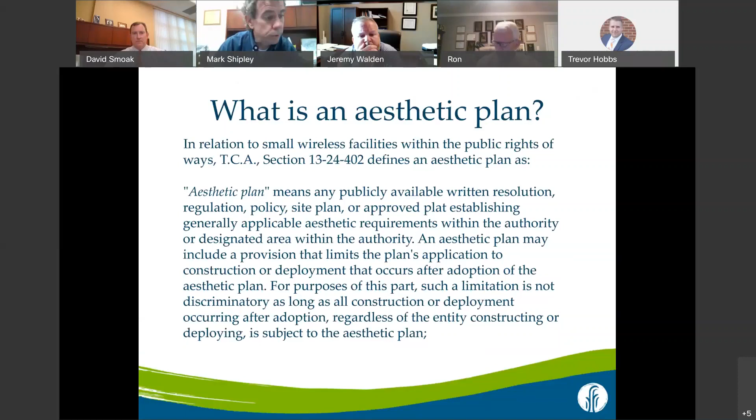As I mentioned, some of our specific goals that we're looking for here. I think it's important that we pay attention to the appearance of our community. I think it's why a lot of people move here and do business in Farragut. You can always tell when you enter or leave the town.

And I think that's something that we take a lot of pride in. So when we have these new utility systems that are proposed and they have a vertical component, what we're trying to do is make sure that those are as attractive as possible, there are as few of them as possible, and that they're appropriate for the context of where they're being proposed.

Eliminating or minimizing visual clutter, being consistent with the new vertical utility structures. This plan is not just dealing with small cell support structures. It's any new vertical utility structures that would be in public rights of ways.

That could be really in the context of what we have in the town, since all of our utilities are required to be underground, all the new ones. What we're really talking about are telecommunications and street lighting for the most part. So that's really what this plan is focused on.

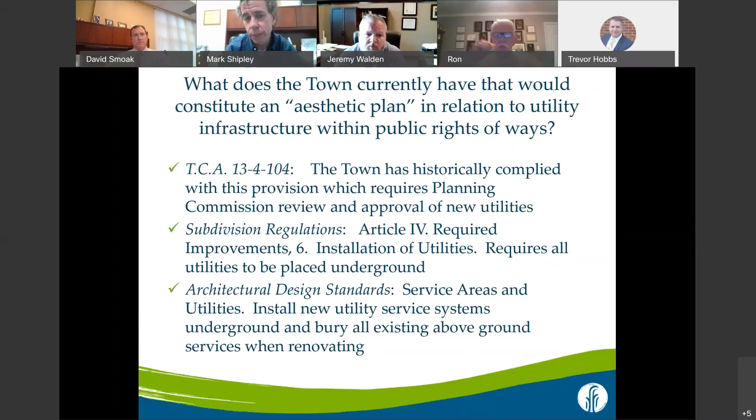And not all of those are in the public rights of ways. We'll talk about that in a minute. The architectural design standards talks a little bit about utilities and the importance of hiding them or concealing them to the greatest extent possible. In 2017, in response to a couple of small cell support structures that we had come to our community on Parkside Drive, we actually went back and revisited our cell tower provisions.

Because they were really only targeting monopoles, the big tall cell towers that are on private property, we tried to update both of those provisions and then also create some provisions that deal with these small cell support structures and DAS technologies. So we put a lot of things in place.

We spent a lot of time. We had a couple of experts in the telecommunications field help us through that process. And I thought we had a pretty good document. There's a lot of things in it that would constitute elements of an aesthetic plan.

But unfortunately, some of those things were superseded or essentially nullified when the state adopted their telecommunications law in 2018, roughly a year after ours. So you could see on the screen there the different components in our current antennas and towers section, which is in our zoning ordinance, that would really constitute elements of an aesthetic plan.

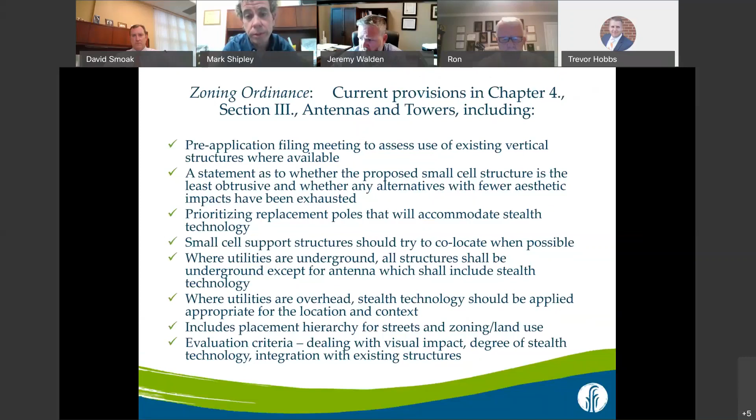Some additional options to consider now that the state has created provisions that supersede what we have. We went back to the drawing board and asked ourselves, within the state law, what can we do? And then, how do we go about doing that?

Some additional options we're looking at are ways to enhance the aesthetic language in our current zoning ordinance. Since this doesn't just deal with telecommunications, we could create a separate section in the municipal code for an aesthetic plan, cross-referencing the antennas and towers section or other sections dealing with street lighting. This would be a document that clearly and prescriptively addresses the appearance of these new vertical utility systems.

That's really the void we're trying to fill. Some of the language in our current telecommunications ordinance was intentionally a little vague, like 'stealth technology.' We do define it, but it's still a bit subjective. So one of the things we're trying to do with this plan is take out a lot of that subjectivity and make it very prescriptive. We'll talk about that when I get to discussing the staff's draft.

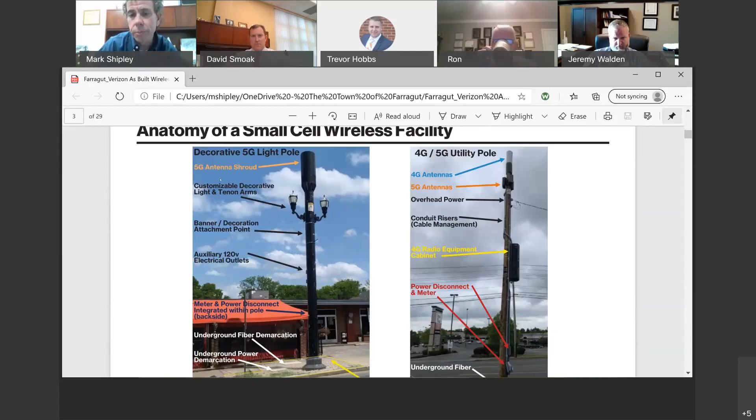They go through a series of different options. Pole co-location - Jeremy's with us here from LCUB - that's obviously the town's favorite result. If you've got a utility system already in place, there's a way to add your structures to that existing system. That's the best option because you're not creating additional new vertical utilities.

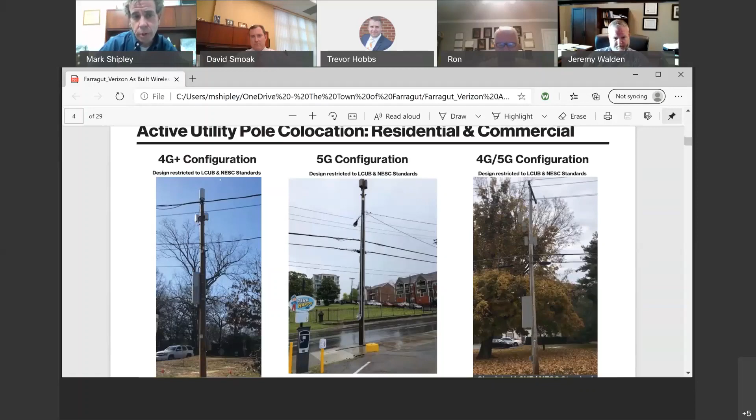So these are some different images of poles. Some are really stealth, some are a little bit more bulky. Some are 4 and 5G - the radio antenna cabinet on the 4G system creates some bulk. What I'm proposing in the draft is if you have a 4G system, that radio cabinet is actually at the base of the metal pole, so it's more part of the pole as opposed to protruding out from it.

If you've got an existing wooden pole that's part of an overhead distribution line system, and they're going to add back a wooden pole, then you really don't have a lot of options. So you just try to make the size of that cabinet as small as possible, and keep it as close to the pole as possible.

They get into some decorative poles, and these are metal pole options, which is what I'm proposing for all replacement poles or new poles in the draft. That's something I do need feedback on.

The main reason for that is you can put a lot of stuff inside the pole, and it has more opportunities for additional uses in the future. That was one of the things I was talking about as an objective of the plan - to try to think ahead. It's kind of like building a stucco building versus a brick building, different construction types.

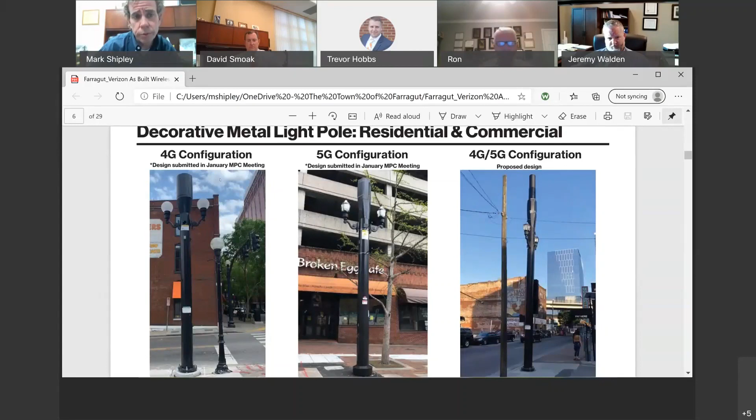So these are pretty nice looking poles, 4 and 5G combinations - these are obviously with some decorative lighting. And then some standalone metal poles with different configurations. The one in the middle is probably most similar to what's on Parkside Drive.

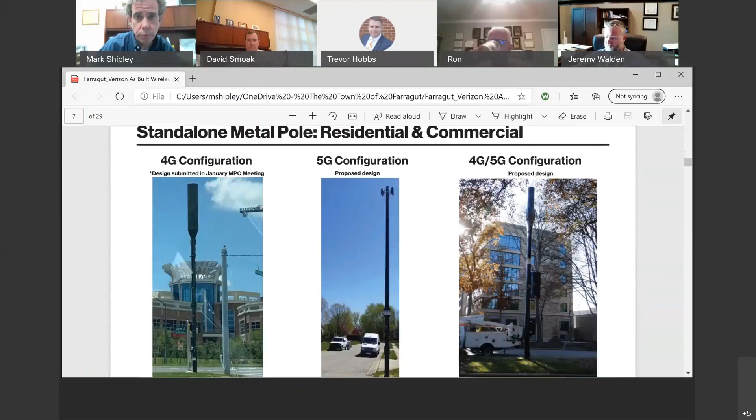Those are metal light poles, and they have the antenna near the top of those poles, but the antenna does kind of extend out away from the pole, which is a little bit different than what we're recommending in the aesthetic plan. Then some of these other antennas are pretty stealth.

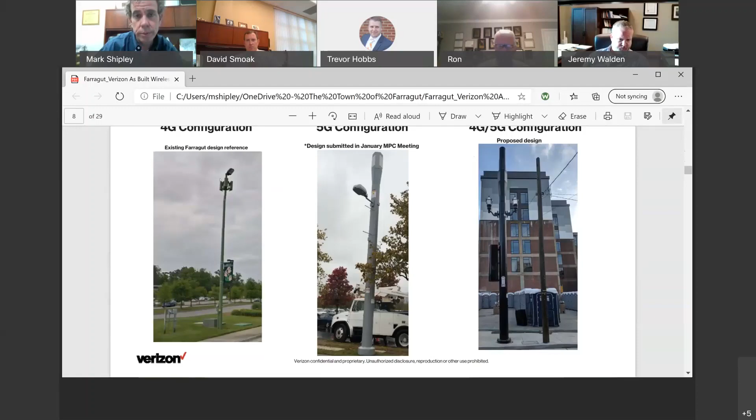This example on the left is actually a pole in Farragut - that was one of our early poles with Zayo, put in 2017. I'm just showing you these to show you that there's really a lot of choices out there. These companies can do more than they may initially say they can do or would want to do, if the community has something in place that says, this is what we expect and what you need to do.

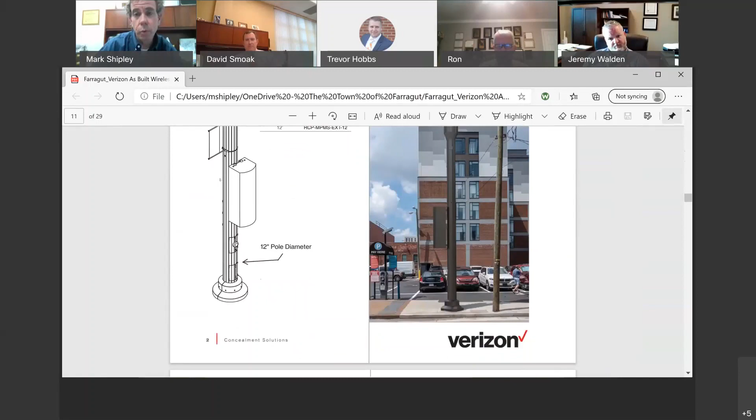And then they have some visuals here with a bit more detail. Here's a 4-5G combination with a pole extension opportunity, but again you see that 4G cabinet that extends off the pole - that's one thing I need your feedback on. What I'm recommending is that be incorporated into the base of the pole instead. We'll see an example of what that looks like later. I think it just looks a little bit more stealth than that option.

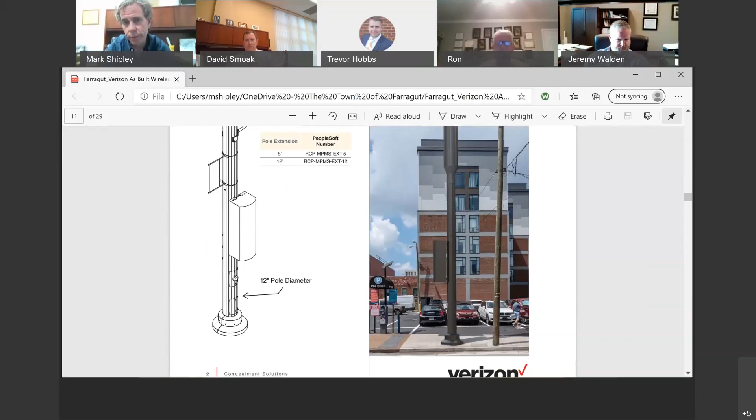Here's another one - not a bad looking pole, but the 4G cabinet kind of takes away a fair amount of the stealth aspect of that.

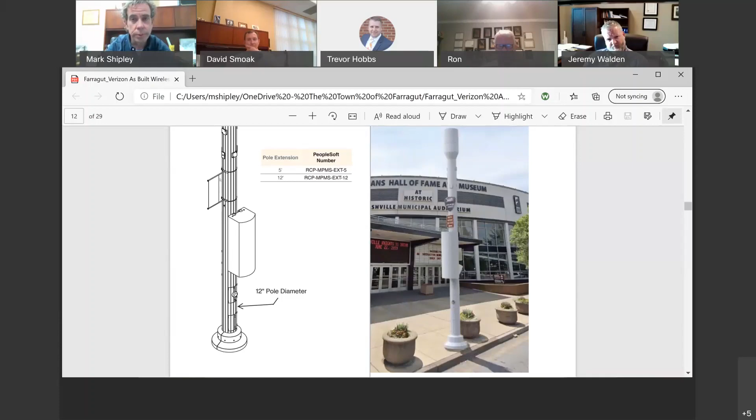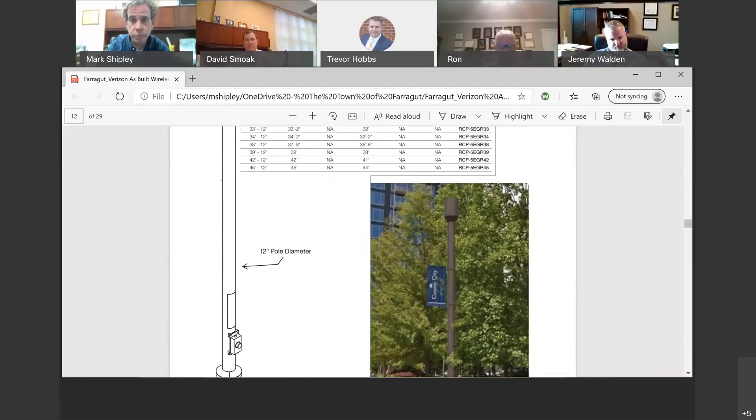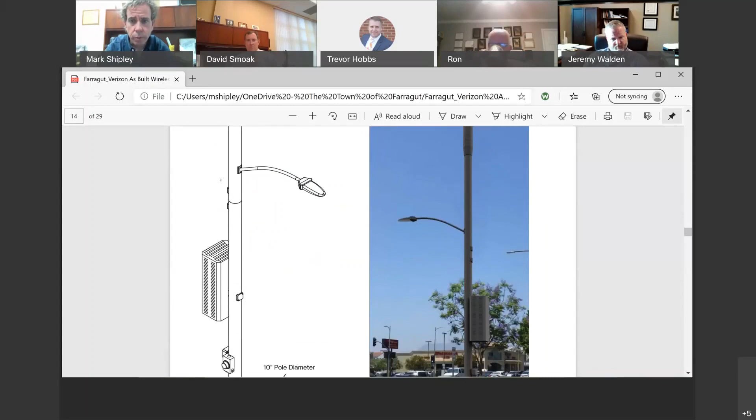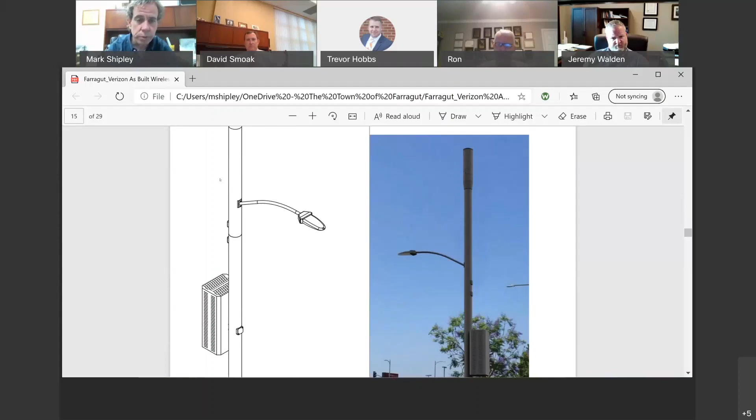Another example, I'll go through these quickly. I want to spend most of the time on the draft and getting your feedback. Most of these 5G poles shown, the metal ones, are pretty stealth. The 4-5G combination, which is what we'd recommend on a new pole in a new location, has to have a dual function—whether it's 4 and 5G, Verizon and AT&T, Verizon and US Cellular, or telecommunications and lighting. It just has to provide for at least 2 different functions on that pole.

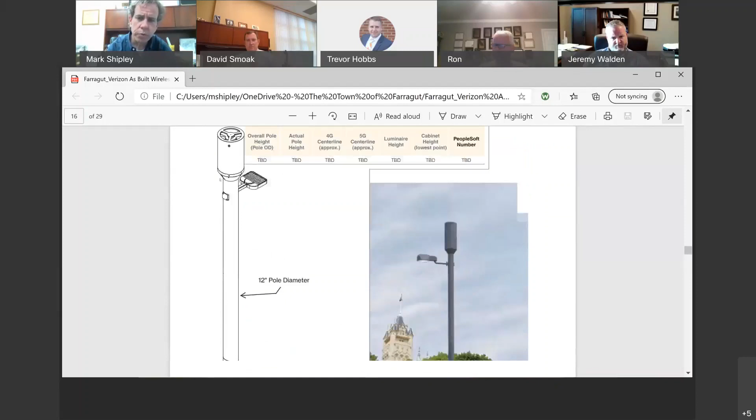Most of these poles we're looking at are 10 to 12 inches in diameter. What I'm proposing in the draft is 12.75 inches, which is a pretty common standard from what I've looked at. Here's a pretty stealth 5G pole with a 12-inch diameter, with the street light incorporated near the top. I don't think most people would ever notice that.

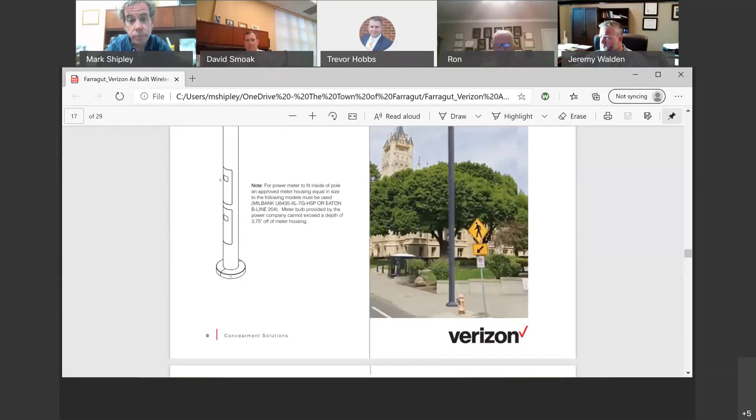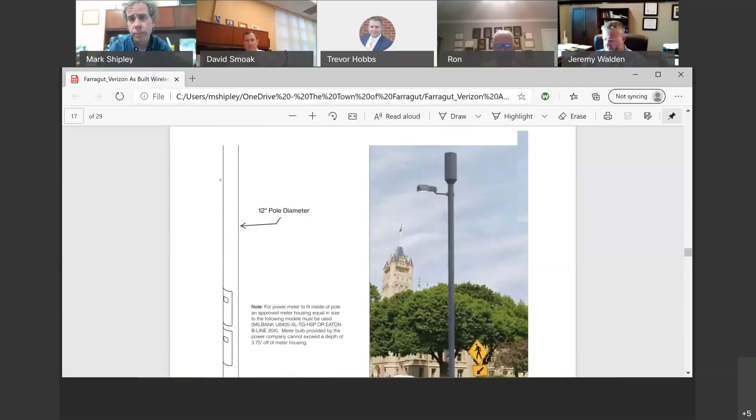Mark, what's the size of the top—the antenna? Those are about 5 feet. The diameter is going to be between 16 and 20 inches, depending on whether it's just 5G or a combination, and anywhere from 3 to 6 feet in overall height. This one is not a combination, it's just a 5G pole.

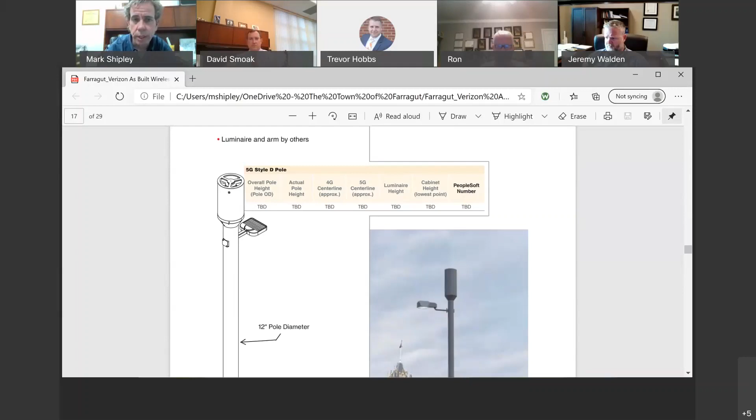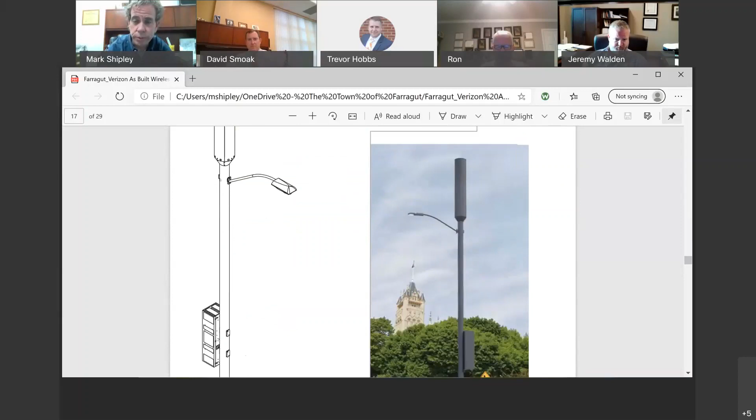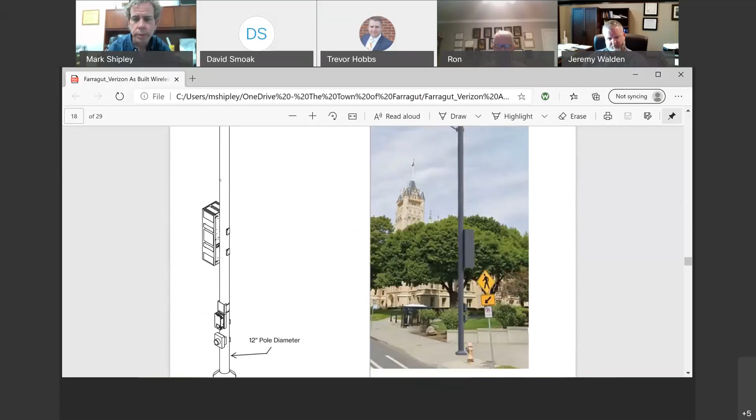Here's a 4 and 5G combination, and you can see how much bigger that antenna is at the top because it has both antennas in that shroud, plus the 4G radio cabinet about halfway down. This next one is just 5G. If you didn't require more than one potential carrier, your antenna would be smaller, but the downside is you might have more poles. That's something to think about.

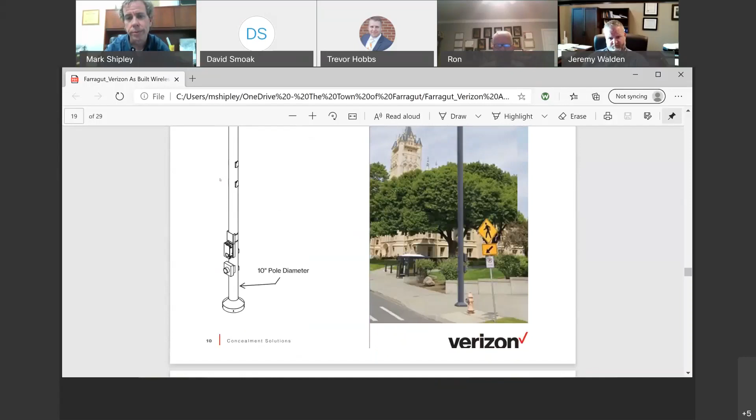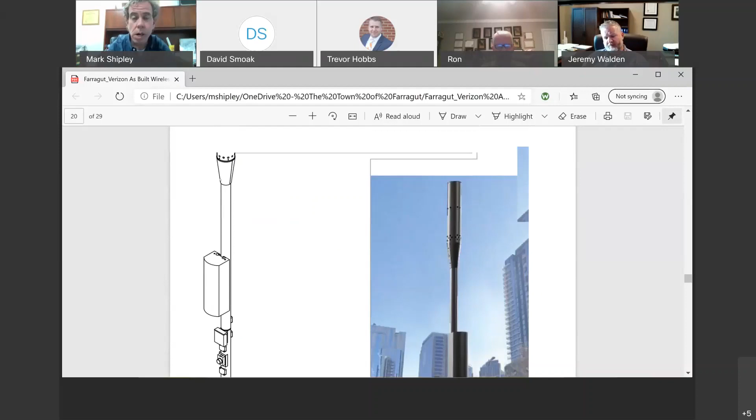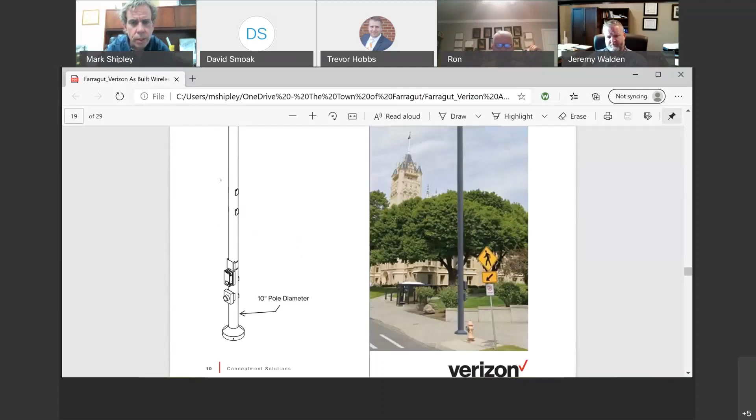Mark asks a question, maybe Jeremy can help. There's a meter on that pole that protrudes. On this pole diameter, you can see the meter down there—can that be inset into the pole? Jeremy, I don't think they read meters in person anymore, isn't that done electronically now?

We read meters remotely now, we do check. I don't know if there's technology out there that could install the base inset into the pole. As long as it met our requirements for accepting the type of meter required—the prongs and connectivity—we wouldn't have an issue with it, as long as we could remove it easily. I just don't know if that technology's out there.

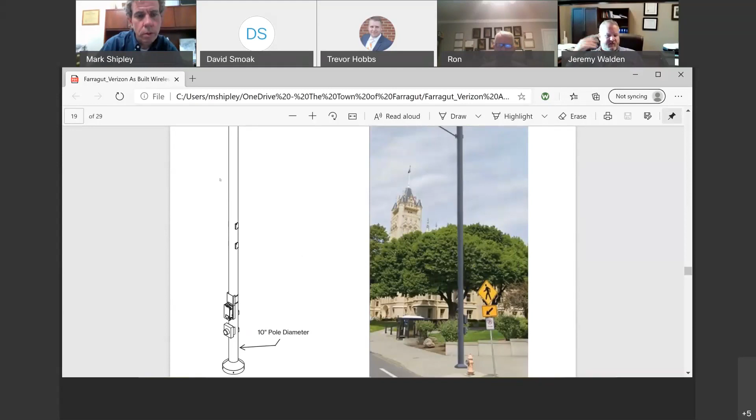Just curious—from a structural loading analysis standpoint, when you put insets at the base of the pole, because of the bending moment at the bottom, the integrity of the pole becomes a little less. But since there's nothing pulling on this pole other than maybe wind, I don't know that it would be an issue.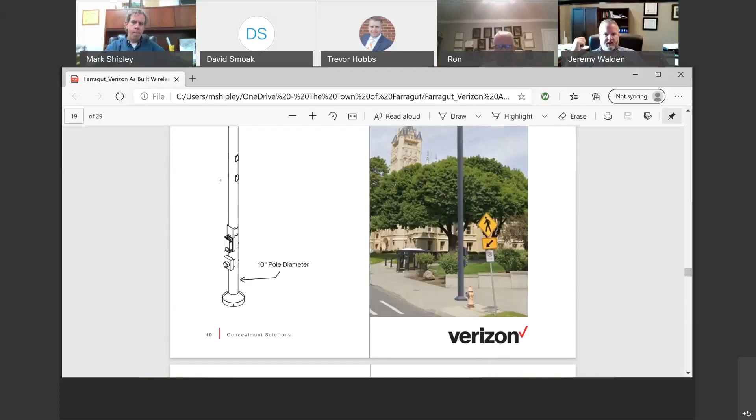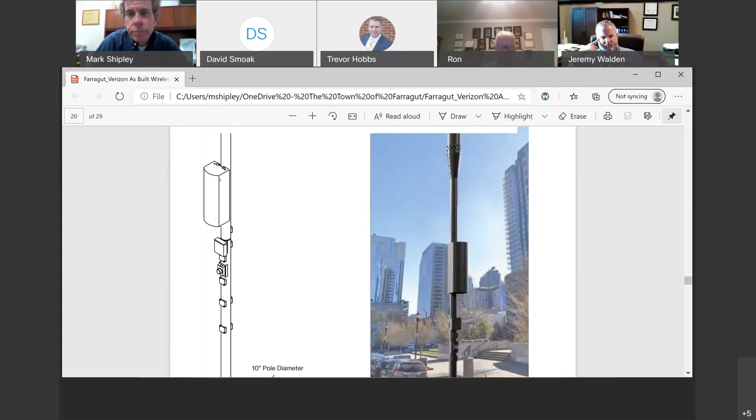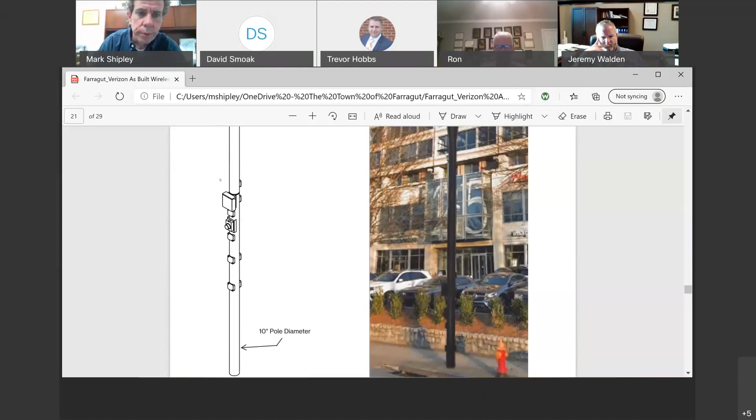Okay, thank you. I'll keep going through these if I see anything that stands out. Again, like this one, some of those structures are higher up on the pole—they can probably put it wherever it needs to go, but that may or may not help with the stealthness of it.

I was concerned about the possibility of damage by somebody—vandalism. Oh yeah, that's always a possibility. I'm sure Jeremy's had some transformers tagged before, people get creative. We've got quite a few poles with meters down at the base, and it doesn't seem to be a real issue for us as far as vandalism goes.

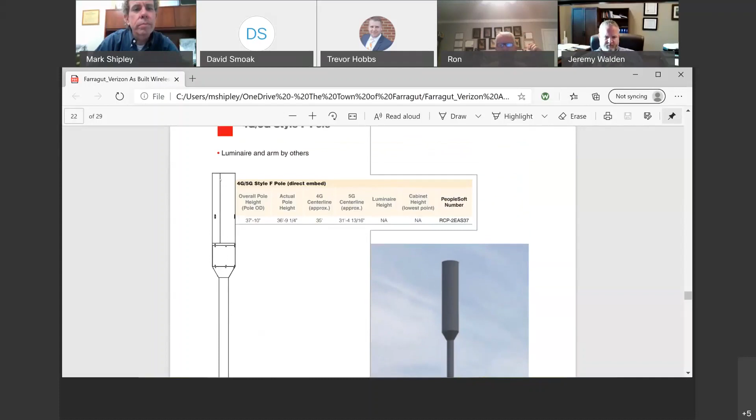Well, I don't think people really concern themselves with what carries the electricity as far as the type of pole. They concern themselves with technology they may not necessarily like in their neighborhood. True, yeah, that could be.

Now this pole here is probably one of the more similar to what we're proposing in our draft aesthetic plan, with the antenna. You've got the transitions, the different components on the pole, where they're tapered, and it's like a smooth, seamless kind of transition. And then that equipment cabinet's at the bottom, at the base.

That obviously does create more space at the ground interface. So if you've got things that could conflict, like a sidewalk or landscaping, that physical space might be a little bit larger by having the radio cabinet down there as opposed to being up on the riser pole. So that's something to think about.

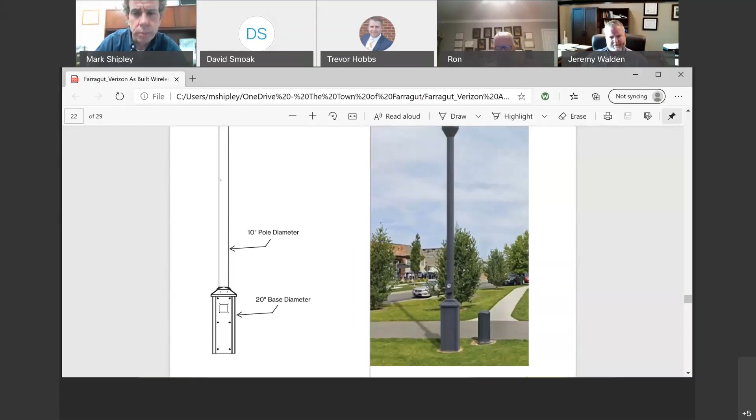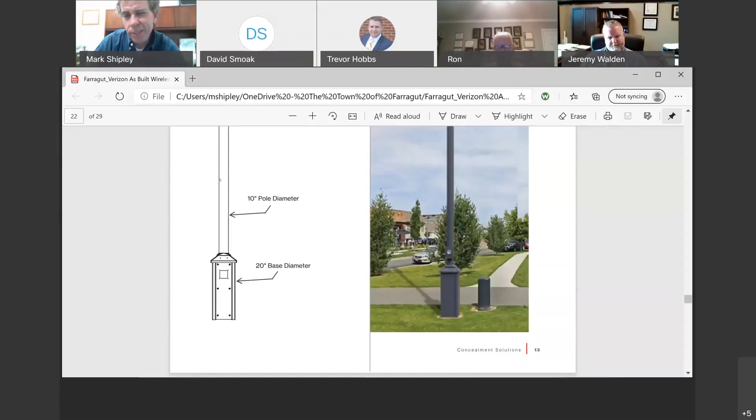I just, from my perspective, and it may just be my perspective, I think that is a better looking pole because it kind of balances itself out. It doesn't have something kind of hanging midway off of the riser pole as you go up. Just looks a little bit more stealth to me.

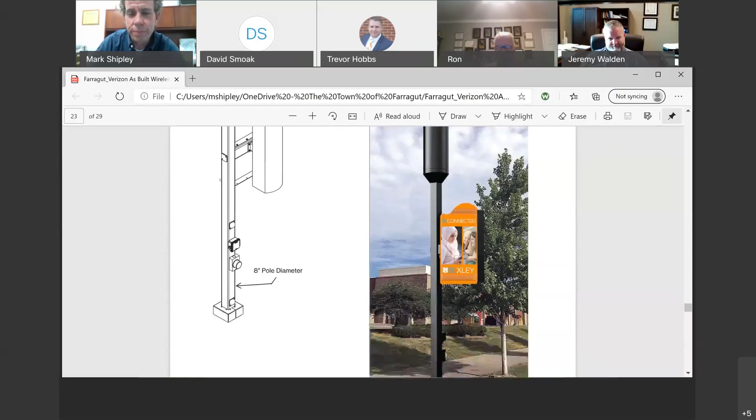So that's kind of a good example of what we're looking at. You can kind of get creative with these 4G cabinets and make them into the town's seasonal banners, and maybe do something with one side of them. This is actually a square pole. Of course, we wouldn't want those banners in a residential area. I was just throwing that out there because they have one on this one as a way to maybe make it more stealth looking or blend in.

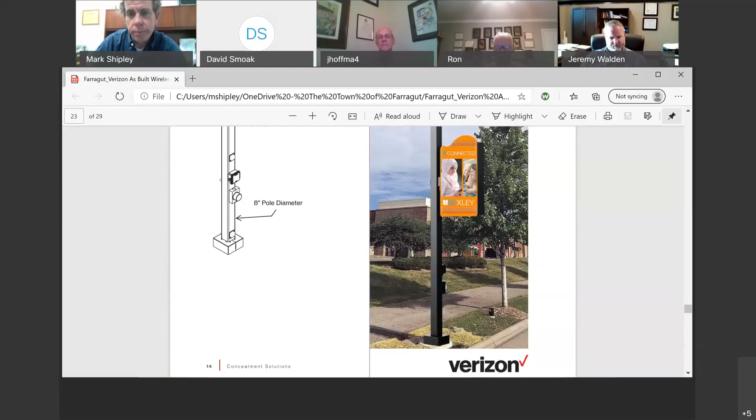And then they had some information here, and that's basically all that I had on that particular document. Did anybody have anything they want me to go back in this for before I go back to the PowerPoint? I just really wanted to show you all there's so many different styles and options out there that we could look at.

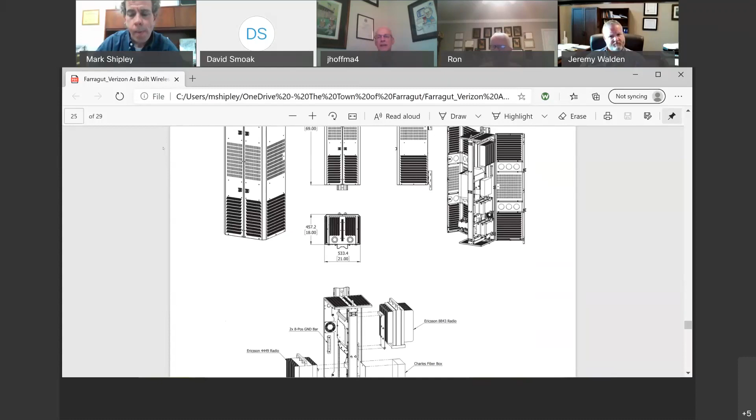Just a quick comment on slides 5 and 7 of their proposal. You'll see poles that are placed very close to driveways. That would be something that I personally wouldn't recommend from a safety standpoint. You'd have a see-over or see-around issue, but equally important, you've got people trying to drive in and out of their driveways and clipping the poles with trailers or moving trucks or whatever.

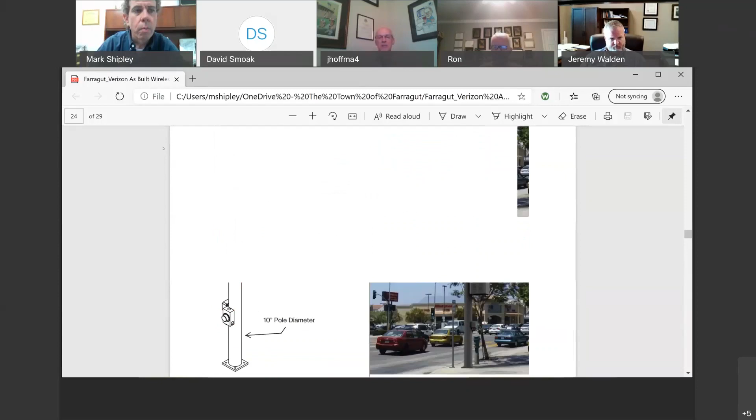Yeah, that would be a concern that I would have. I'm not sure it's aesthetic as much as it is safety, but yeah, on those, what will be called in our draft type 3 poles, because there'll be new poles and new locations, we do have some placement considerations built into the draft that talk about where you're placing these new poles and making sure you're not creating conflicts or visibility obstructions and things like that. We'll go over that here in a minute.

But were you talking about these here, John? Yeah, if you look at where that pole is, that's probably 1.5 feet from that fellow's driveway. I'd hate to get him moving there, or a house trailer or a boat or whatever.

Yeah, we actually had one of the nodes that the Planning Commission looked at back in January. They had to move it a few feet away from the guy's driveway because he came to the Planning Commission meeting and had a concern about that. He said he wasn't a good driver and he's very likely going to hit that thing one day. So I guess they realized they didn't want to have that chance being taken, and they ended up moving it a few feet away from the driveway.

So hopefully, if we run into situations like that, they can move them at least 10 to 15 feet one way or the other. Because that's going to be important in a lot of areas where you've got potential conflicts. All right, so I'm going to jump out of this unless anybody else has anything on this one.

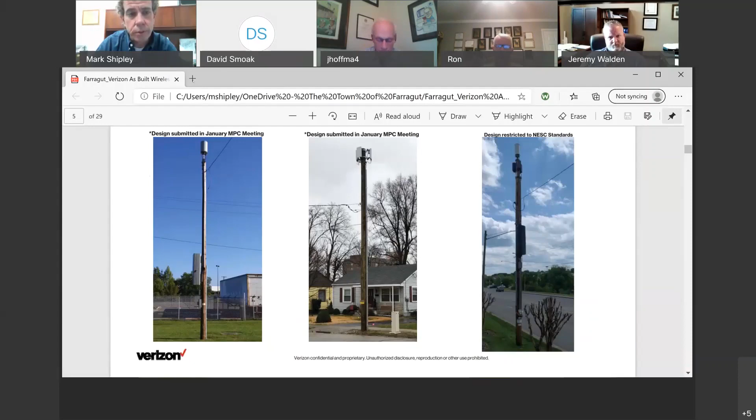Now I really want to spend most of the rest of what we have here talking through the draft aesthetic plan, and just going through what the current components are, and then asking you all some questions about the plan and getting your feedback. It is a draft.

There's still, and I understand in putting this together, there's still a lot of stuff that I'm not happy with, and it needs work. I just was at a point where I really needed some feedback to know which direction to go.

So let me just go through this draft by section and just talk through a little bit what we're talking about here. Obviously, with any document, you always want to have an authority section. We did that with the sign ordinance, John, as you remember. And then kind of related to that, a need. Why do we have this document? What are we trying to accomplish by having this document?

In the need section, we talk about the town's high aesthetic standards that we've always expected, and the fact that we've always had new utilities underground. So what we're trying to do with this plan is make sure these new vertical utilities that can't be placed underground look as good as possible. There aren't a whole lot of them, hopefully, so we can limit where they go and control the aesthetic impact to our community.

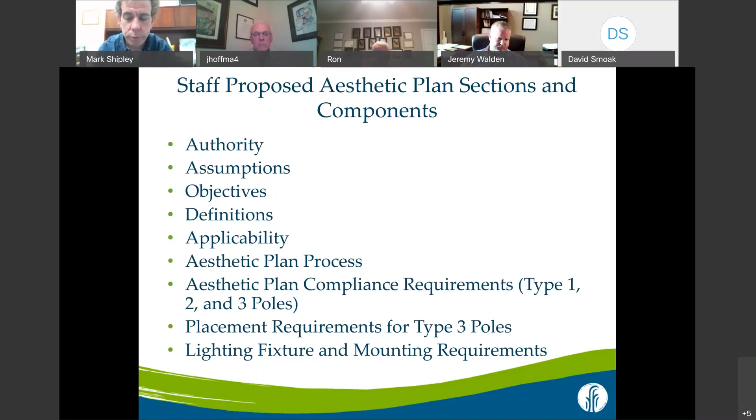And then we go to the assumptions section. We're assuming that we're going to continue to take utilities to the Planning Commission, and that we're going to continue to have all new utilities underground, except for the ones we're talking about in this plan. We also acknowledge the existing utility system in our community. There are existing overhead utility systems, which I've defined in the plan as overhead distribution and transmission line systems mainly, that service multiple utilities and typically have several lines on them.

So I wanted to be clear in the assumptions that really what we're talking about are telecommunications and streetlights. We're not proposing to deal with residential street lighting — that's a much different type of light than regular street lights, and it's also not required by the town. Subdivisions, homeowners associations, or developers, when putting a subdivision in, can choose whether they want to provide street lighting, and then they just have to follow the requirements in our subdivision regulations.

There's a 16-foot height limit, so that's not going to work for telecommunications. Plus, the pole itself isn't physically capable of accommodating these kinds of additional structures, and a lot of times these poles aren't even in the public right of way. So that's another thing — we're not talking about utilities outside of the public right of way. Even if they're in the utility easement, they're not really part of this plan. It's new utilities that are in the public right of way.

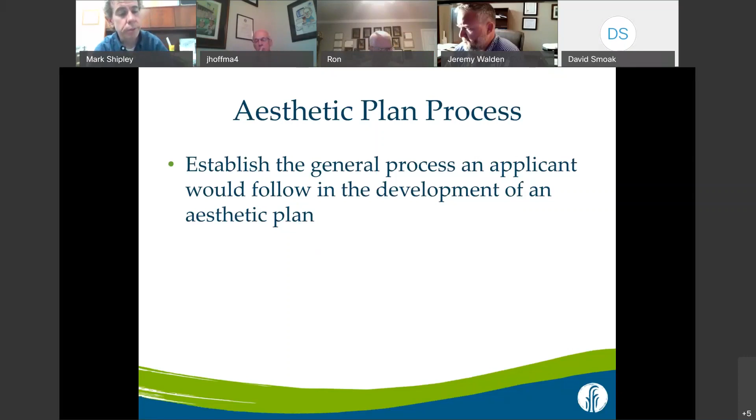So if somebody is ending up with a new pole, there are some specific requirements we would expect them to follow aesthetically. This would go through the Planning Commission, potentially the Board of Mayor and Aldermen - it depends, but it would very likely rarely, if ever, go to the Board of Mayor and Aldermen. And then there are the kinds of documents we would expect as part of a right-of-way permit, because that's going to be associated with the pole installation itself.

And then we get to the real heart, I guess, of the aesthetic plan, and that is the requirements for the different types of pole systems that we have. I went back and forth on this for a long time - there's a lot of stuff you could do with this, and I'm really just proposing probably the most simple, straightforward approach for consideration, at least.

The way I see it, you've got three types of poles in your community: poles that are part of an existing overhead utility system, street lights that are in a system that doesn't have any overhead utilities, like on Parkside Drive or South Campbell Station Road, and new poles in new locations. So the way the plan works is it deals with each of these very specifically.

So type 1 poles are kind of like what Jeremy would be mostly involved with, and these are probably mostly wooden poles, frankly, in the town, at least with the distribution lines.

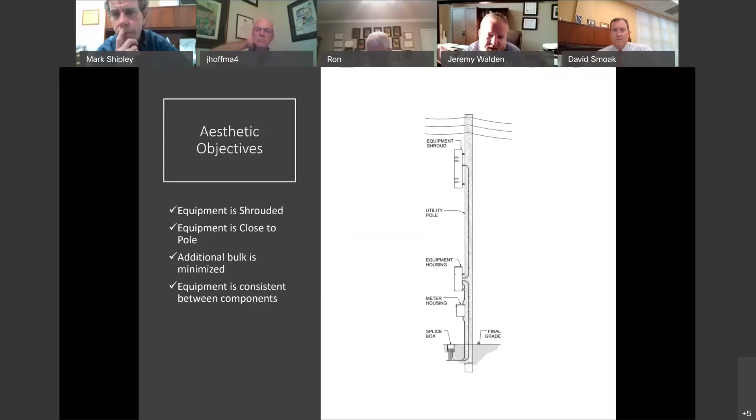We are not allowing that right now. That could change, but right now I'd say it's rare—there probably could be some poles out there that we may not have to change out, but given the size of most of these and the amount of attachments and telecoms we have on our poles, most of them are going to have to be changed out for a taller pole. Yeah, you have a lot of stuff on your poles.

Yeah, I think that's why they're not electing to go with our poles in a lot of situations, because our make-ready cost—what we call make-ready, to change the pole out—is a lot more than if they could set their own new pole. Yeah, because what I was recommending here, my assumption on the type 1 pole is that it wouldn't have to be modified.

They'll just, as long as it can carry the weight, whatever they're structurally sound enough. But what I am proposing with the other two poles is, if you did have to replace that wood pole in a wood pole system, what is in the draft now is that it would be going back as a metal pole.

But the other structures could be attached as is to the metal pole. So that's something we need to talk about, because I want to be clear that you understand what's in the draft on that.

Now, this pole here, since the antenna is below the lines, of course this is not a super busy utility line, would probably be okay as a type 1 pole with that. Wouldn't have to be modified. In other words, the pole wouldn't have to be taken out of the ground, replaced.

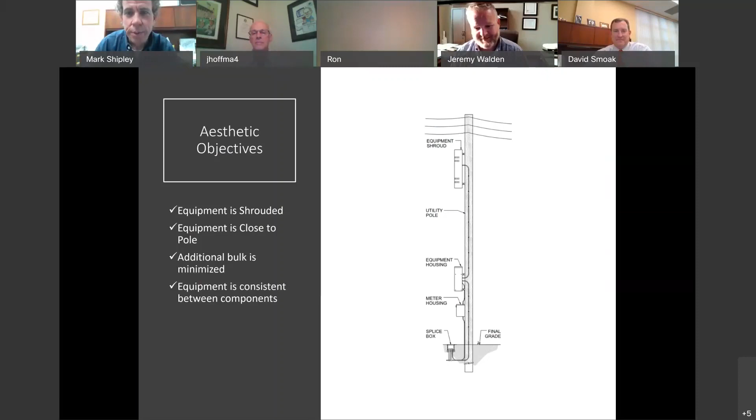Yeah, I'm gonna have to have some more detailed conversations with you all in particular about some of these things. But let me just go through this again real quick. Hey Mark, let me ask a quick question.

Looking at the drawing and the photographs, my question may be irrelevant, but I think it's important to ask. Do we have any provisions anywhere that define the existence of ladders or climbing hooks or similar things that allow people to go up the pole? My thinking is that if there are ladders or climbing hooks, it's going to be just like when I was a kid - some kid's going to want to climb it.

Well, LCUB has standards on that, I'm sure. LCUB standard is that any pole with a small cell has to be within 15 feet of a road and reachable by a bucket truck. In other words, we will not climb it. Okay, awesome.

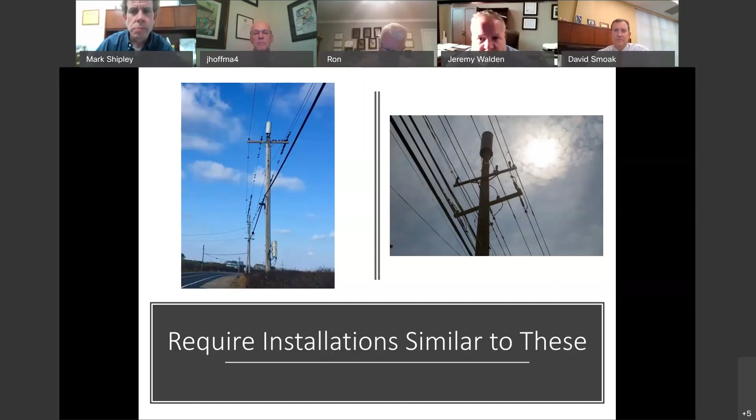Okay, the second type of pole - remember I only had 3 in this draft. The type 2 pole would be an existing pole that would have to be replaced to accommodate the proposed additional vertical utilities.

What we've seen so far, the most common example of that's been our light poles on Parkside Drive that have been replaced. Those actually, the old poles have actually been taken over to our public works facility so we could have spares if we needed them.

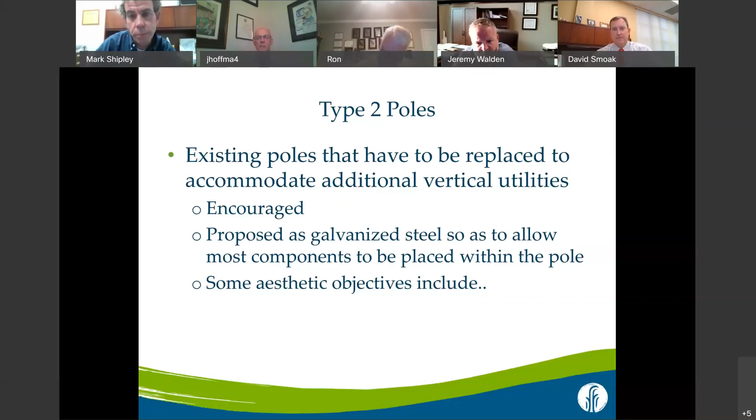So what we're talking about in that section of the plan is that's also an encouraged option, because again you've got an existing pole, an existing location. If you can accommodate these new structures on that pole, then that's better than putting a new pole in a new location. As I mentioned earlier, we're proposing galvanized steel so that it would have a hollow interior and the opportunity to place components within the pole and create a stealth appearance as possible.

And this is an example of what we would be looking for in a type 2 pole. You've got the light fixture there, and this one has a 4 and 5G option at the top, and then you've got that 4G radio antenna cabinet at the bottom.

All these sections of the pole system have a transitional element that makes the pole look seamless. Those are all kind of important aspects to trying to make these blend in to the greatest extent possible and look as narrow and least bulky as you can possibly have.

So with everything, the equipment would be shrouded. The equipment is actually built as part of or contained within the pole. And these are again the ideal situation that we're recommending - that all the equipment's consistent between the components, and as I mentioned earlier, the transitions are appropriate.

The location of the light fixture would allow for the most stealth possible location for telecommunication antennas. That's an issue right now that we have with some of our street lights on Campbell Station and Parkside Drive - the light is at the very top of the sign or top of the pole. So the antennas have to, when they're added to the pole, protrude away from the light for reception purposes. The idea would be to actually have the antenna or the antenna shroud above the light so that you eliminate that conflict. So that's something we need to look at with light pole systems, I think, as lights transition in and out throughout our community.

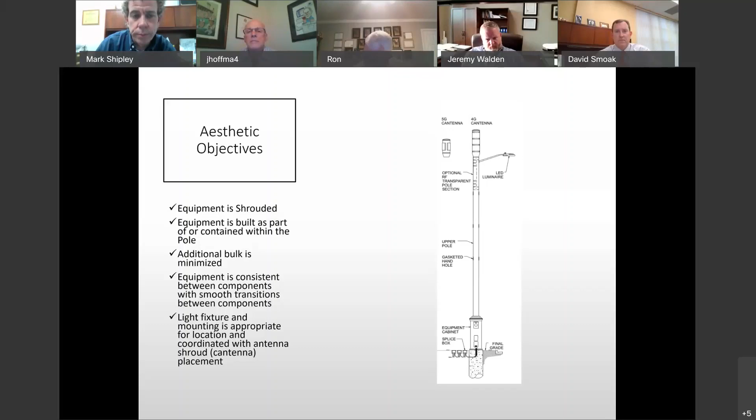Obviously structurally, the foundation has to be able to accommodate all the structures envisioned for that pole. That's the reason our light poles have to be replaced - they weren't designed to accommodate the weight of small cell support structure systems. So that's something you'd need to make sure about, establishing very specific dimensional limitations on the structures that can be added to poles.

What's in the draft is that the outer dimension of a cantenna is limited to 19 inches. Most of them are going to be less than that - most of the 4Gs are going to be between 14 and 16 inches, and the 5Gs could go out to as wide as 19. And then that cabinet at the base of the sign would be maxed out at 20 inches.

Making sure that all the wires and cabling is hidden either in the pole, or if it's on a wood pole, it's attached right against the pole so it's not visible. And then thinking about our lighting system being not just lights now - when a light is added somewhere, that light needs to serve more than one function. Can it provide the opportunity to have a telecommunications antenna on that pole in the future?

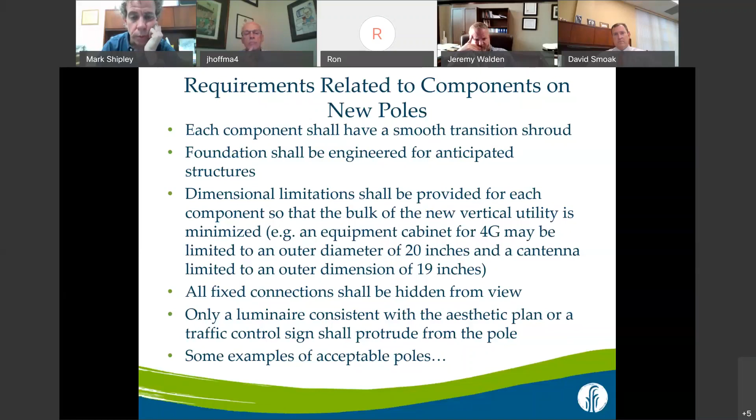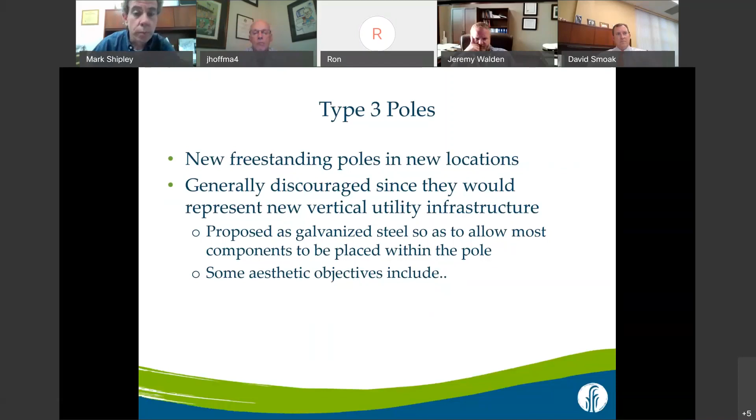And then finally the type 3 poles. Those are least desirable because this is new poles in new locations, which is what I'm trying to think here. I think all of Verizon's initial round would be type 3 poles. What we're proposing with these poles, similar to type 2, is that they would be galvanized steel, again, so that you can put stuff inside the pole to lessen the bulk.

And here's an example of the dual function requirement in these type 3 poles. The one on the left is a dual function pole - it has 2 different types of telecommunications technologies. And the pole on the right is dual function, it has the option of 4 or 5G plus a light in there. You can see the cabinets at the bottom kind of balance out the pole as a whole, as you've got wider space at the top and bottom with a pretty narrow riser pole in between.

And then all the transitional parts of the system kind of blend in together. So that's what we would be looking at in the draft if someone were to propose a new pole in a new location. It would look something like that.

Quick question - the illustration shows a combination of basically co-locating 4G and 5G. What about co-locating 2 5Gs on one pole? Yeah, you could do 2 5Gs. You could do a 5G AT&T, 5G US Cellular. All that we're recommending or requiring in the draft is that the pole has at least a dual function. So that would qualify, yeah. It could be 2 5Gs. As long as both are permitted, that would be a good thing.

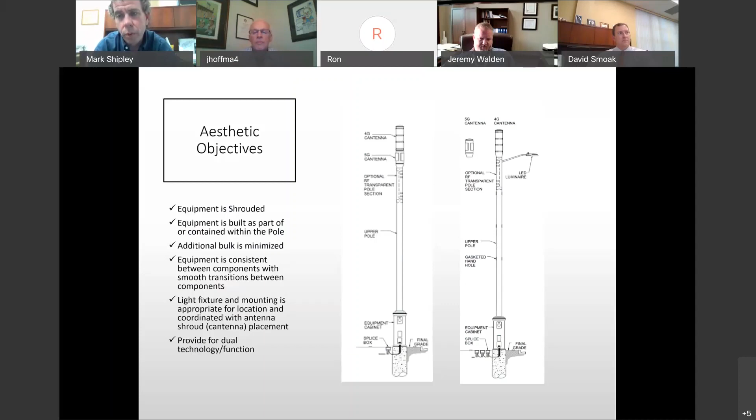So with the type 3 poles, since they are new poles and new locations, we've got a section in the draft that talks about placement requirements. Some of those may or may not be possible, but I've got them in there, and it's the typical things you would think about. But really what we want to try to encourage these folks to do is to try to avoid residential areas if they can. And if they do have to put them in a residential area, let's look at the open space lots - where are they? Would any of those work?

If that doesn't work, then let's try to put them on side property lines. Let's avoid existing potential tree conflicts, obviously avoid creating obstructions or interference with existing public infrastructure, things like that. So just a lot of different placement requirements for these type poles. The other 2 poles, since they're existing locations, really aren't subject to this - it's just for these type 3 poles.

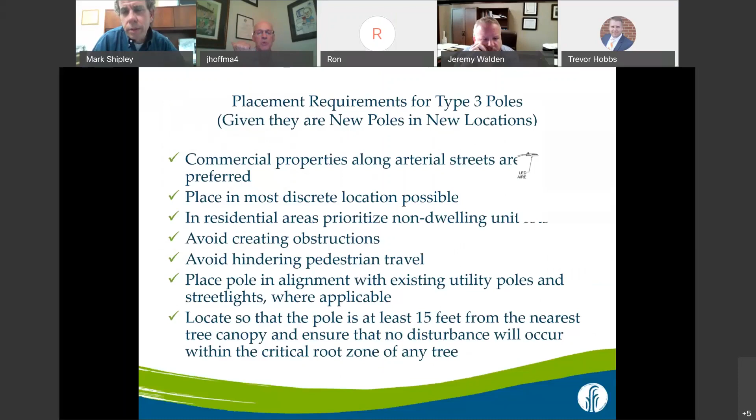On that slide, you have several times used the word 'should,' and should is just a recommendation. Be sure that when you're really writing this out, you say 'shall' when you mean it.

Yeah, that's a good point. I'm trying to look here at the actual ordinance. Well, now I'll tell you this, and the PowerPoint's a little different. I was kind of paraphrasing it from the ordinance. The ordinance is more specific. It does say type 3 poles shall be placed using the following requirements, and then it goes through a bunch of these things, but it leads into that by saying shall. So I think the PowerPoint's not as strong a language as the actual draft of the plan itself.

Very good, don't want us to get burned that way. As an old-time spec writer, I got burned a couple of times back. Yeah, there's a big difference between should and shall. I think some of that language I might have taken from a PowerPoint that was done back in June too.

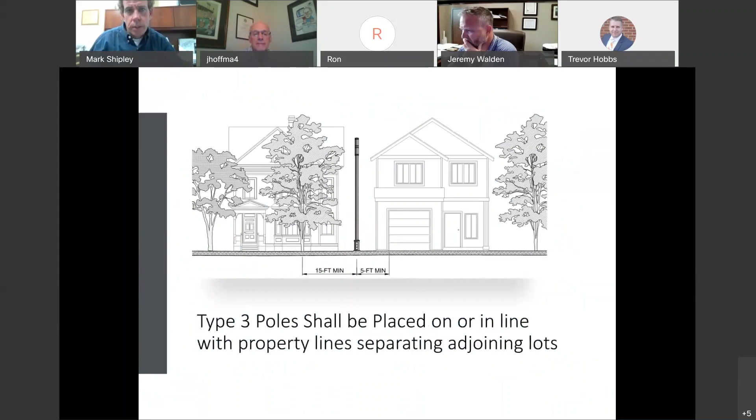Something I haven't really spent a whole lot of time on, though I did have some help trying to get research on this, is lighting fixtures, because that's the other new vertical or modified vertical utility this plan really is addressing. It's telecommunications and street lighting. So we really need to have a conversation about what kind of lighting systems we envision in the town, now and in the future, as poles are changed out and repurposed. Is there a certain type of pole and fixture that can accommodate telecommunications, but also certain light fixtures and mounting styles that would be appropriate for the context?

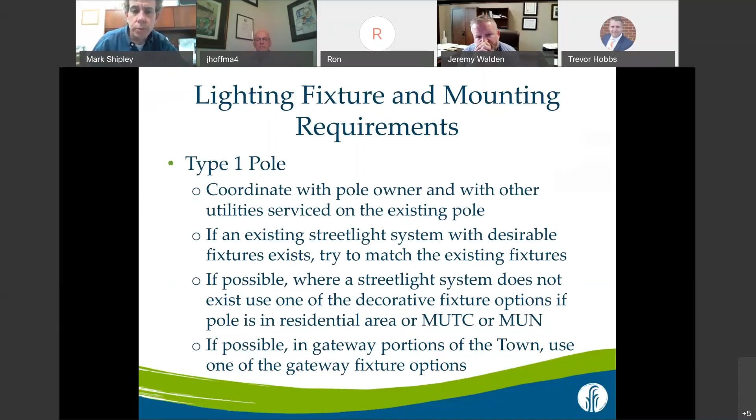So that's really what this last section is talking about - if you have a type 2 or 3, or maybe even a type 1 pole, and it's in a residential area or mixed-use town center or neighborhood, it needs to have a decorative fixture option, maybe also for a gateway. That would apply to all 3 pole types, depending on the context.

So that's the kind of light styles we'd probably want to see in these areas. I don't know that we need a standard that applies everywhere. I think it might make more sense to provide some options that people could choose from, depending on the context.

A series of options. The problem with lighting - I've known working with it on site developments over the years - is it's constantly evolving. It's like telecommunications. Our ordinance needs to be updated for outdoor site lighting because the technology has changed so much since it was created several years ago.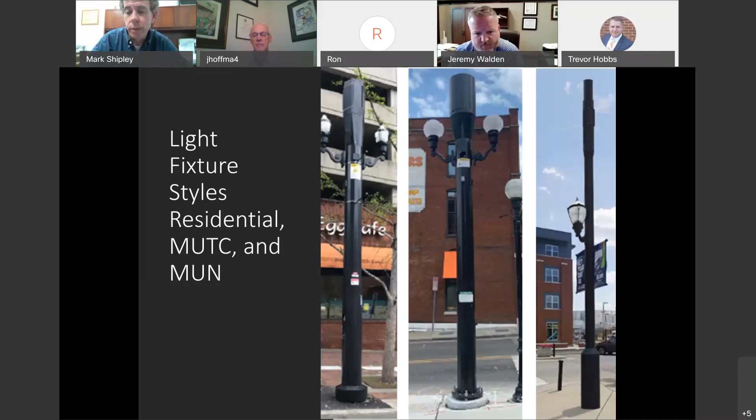And that's always going to be the challenge - speccing a light fixture that may be obsolete in a year or two. I think the idea would be that this general style of fixture and mounting arm is what we'd want to see in these areas, when lights are added to existing poles, or poles replaced and a new light is added.

Mark, yeah, I would just comment real quick that I'm not sure if we do your maintenance contract for your lights - if we maintain them - but we do with others if we don't maintain yours.

Standardize is a strong word, but keeping them as close as possible, just because having to keep several different items in stock can get expensive after a while, instead of being able to keep one particular product versus 10 different ones. It can get expensive keeping that.

Maybe if you had a decorative light fixture, maybe just have a couple of options in that kind of category. I would limit it at least, especially whether it's LED or whatever you have installed, to size as far as wattage and stuff like that. But even the fixture type itself - when you're keeping 10 different light fixtures in stock, it can drive costs up. Just a point to make.

No, that's good. Yeah, I've got something as well. Say you're going to have two functions on that light - we'll use Sweetbriar as an example. Let's say they go in there like they're fixing to do, and Sweetbriar does not want streetlights.